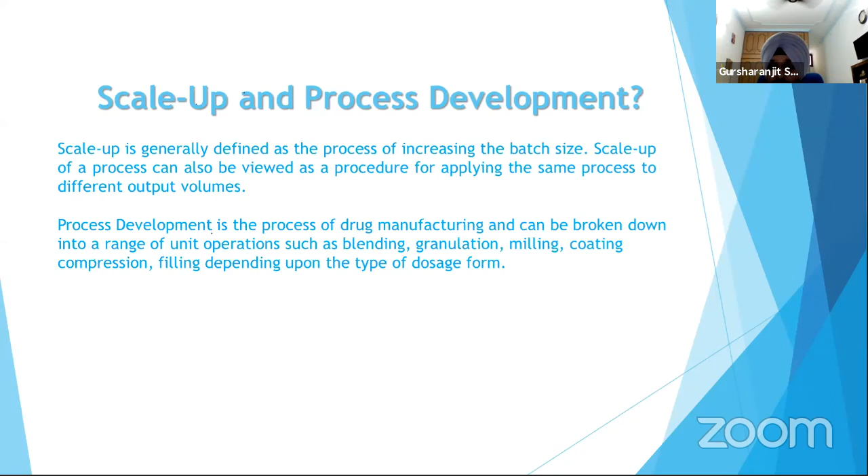Then comes the question - why scale up and when scale up? As I said earlier, whenever there is a need of the organization - it could be for filing purposes, or just to increase the batch size - we will be asked to increase the batch size by doing the scale up.

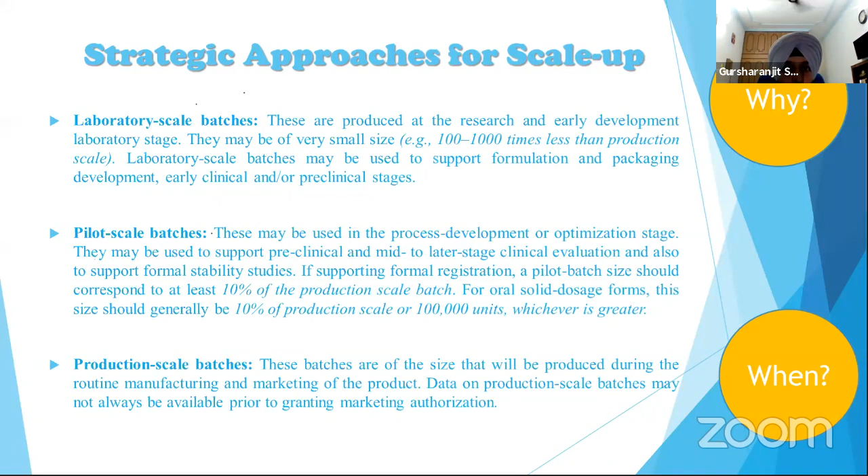Gursharanjit sir. Yes, sir. Please tell me.

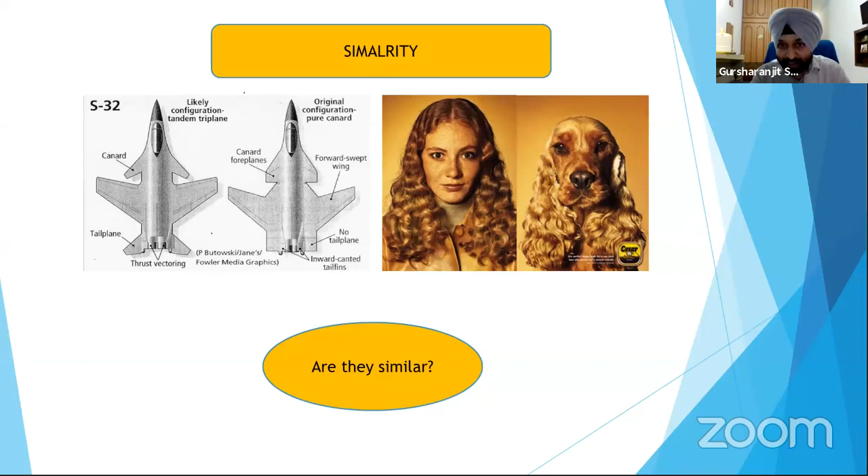So similarity is most important when we are talking about scale up and process development. I will come to the further slide which will give you more clarity about what I'm talking about similarity, and how to achieve process similarity during the scale up. So basically, if we want to go for a scale up, our process should be similar - it should be geometrical similarity, kinematic similarity, and dynamic similarity.

Geometric similarity means characteristic linear dimensions. Kinematic similarity is same ratio of velocities between two points, and dynamic similarity is same ratio of forces between two points. So process similarity can be achieved after getting geometrical similarity, kinematic similarity, and dynamic similarity.

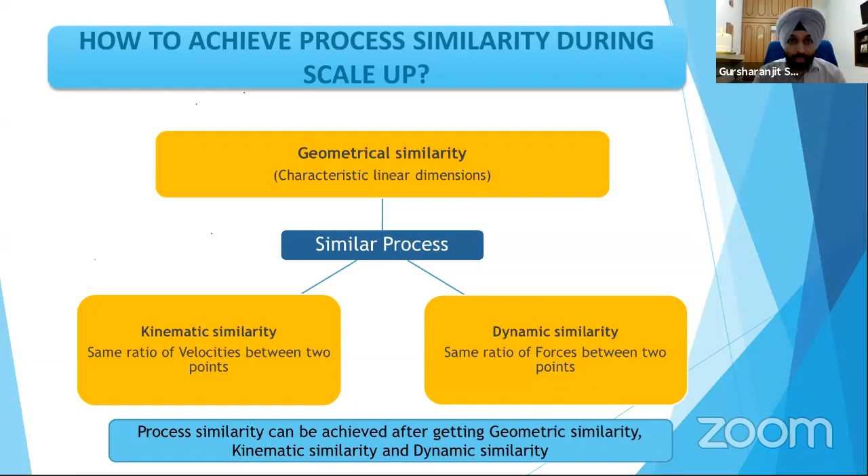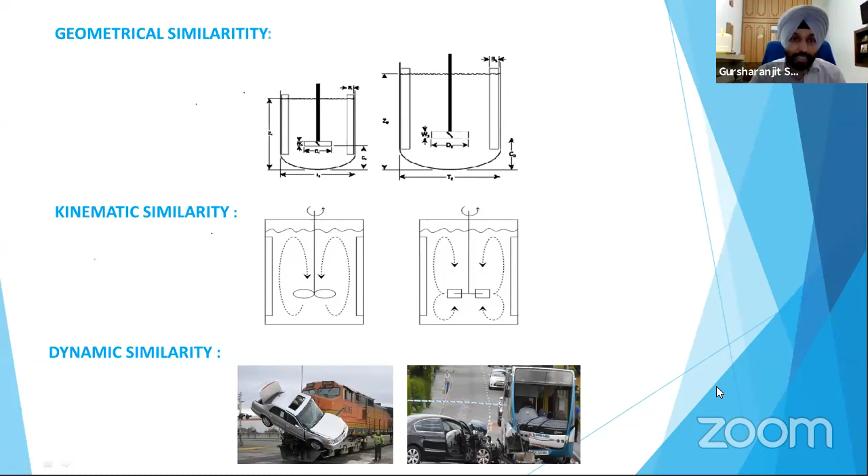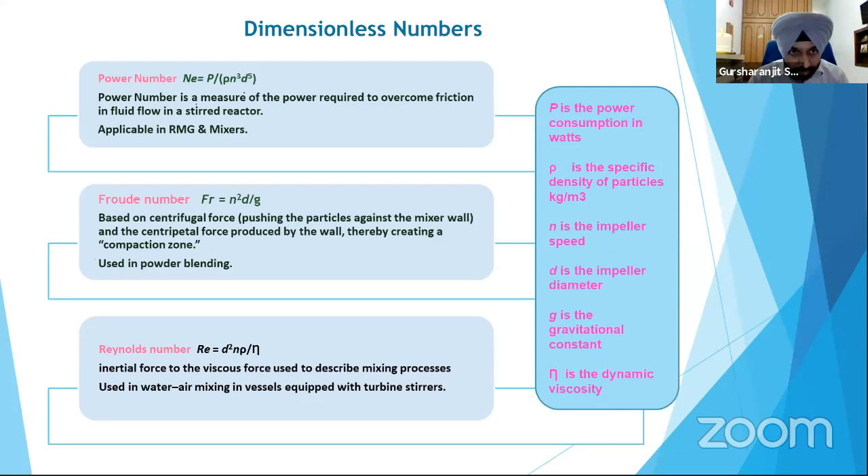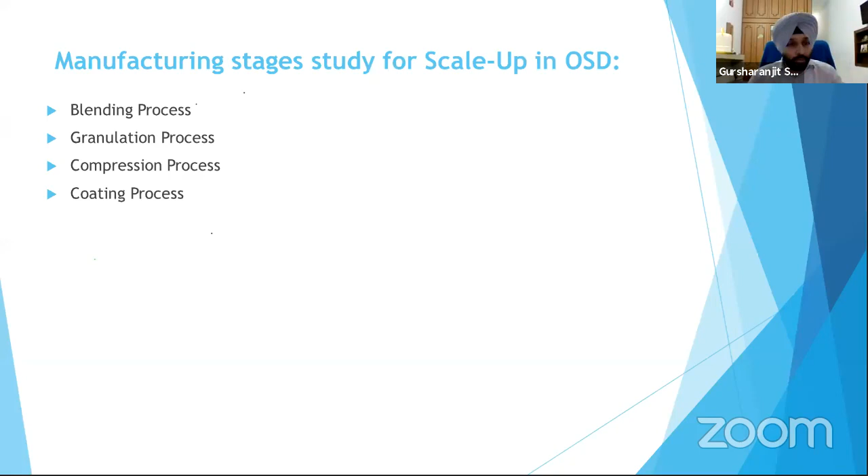In this presentation, basically I will be giving an overview of the scale up for OSDs, because OSDs are the dosage form which are maximum manufactured, and knowledge about OSD scale up is a must if anybody is interested to join the industry. So basically in OSD there are four basic kinds of unit operations: first is blending process, second is granulation process, third is compression, and fourth is coating process.

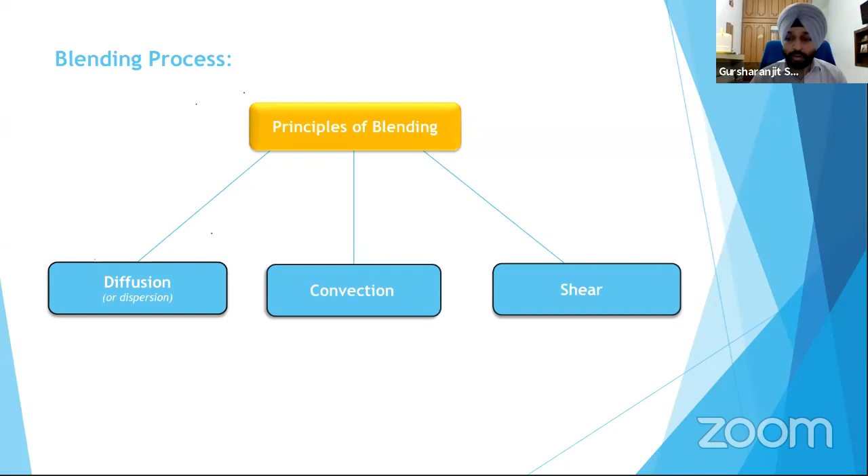Blending process is a very critical process, and the basic principle of blending is diffusion or dispersion, convection, or shear - these are the three basic principles for blending. For any oral solid dosage form where the dose is potent or low, like less than 25 mg, ensuring the uniformity of the blend is very important as well as critical.

So in this slide, I have presented the blending principle along with examples of various kinds of blenders used in the industry. Diffusion - what is diffusion? Diffusion is the redistribution of particles by random motion within the powder blend, which causes them to change their position relative to one another. Examples of blenders commonly used in the industry are double cone blender, octagonal blender, V shell blender, and bin blender.

Next is convection. What happens in convection? The transfer from one location to another within the mixture with motion is imparted by an impeller, as in the ribbon blender. I mean to say that here the movement of your powder will be with the help of an external support, that is a ribbon.

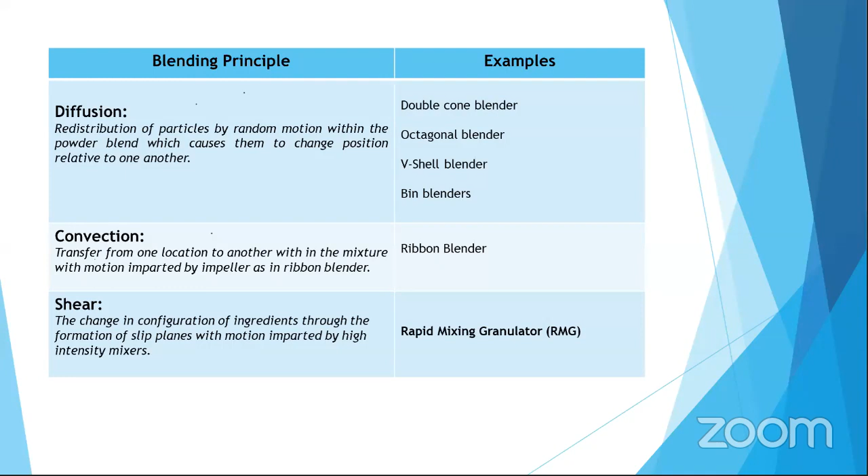Next is shear. Shear is the change in configuration of ingredients through the formation of slip planes with motion imparted by high intensity mixers. An example of this is the rapid mixer granulator, where impellers create the slip planes once they start moving, which helps in the mixing of the blend.

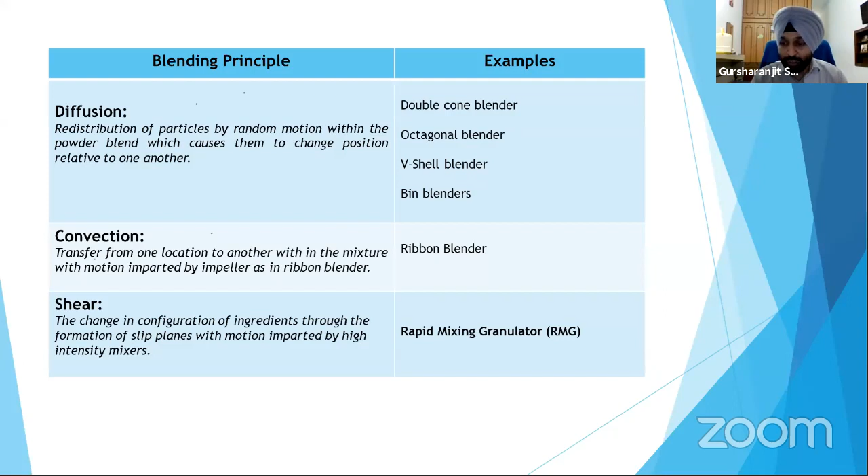So this is the pictorial view of different blenders which I talked about: double cone blender, octagonal blender, V blender, and bin blender. These are all diffusion blenders.

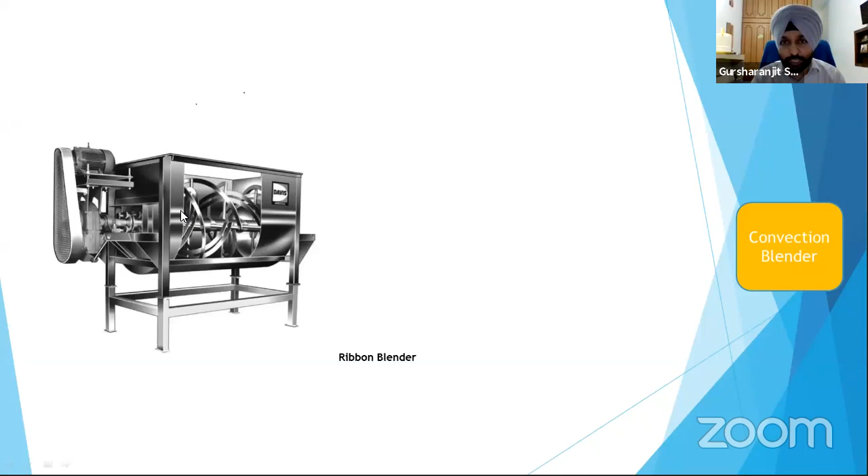Next is ribbon blender. There are a number of ribbons, and these ribbons move with the help of a motor, causing movement of the powder from one place to another. But these kinds of blenders are not used much in the industry nowadays. They are more frequently used in the bakery industry for making dough, because there are a lot of dead spots in these, and uniformity related issues, so these are not much used.

Next is shear mixer, which is a rapid mixer granulator. As mentioned earlier, it has impeller blades which help create slip planes in between the powder, causing movement of the powder, which ensures mixing.

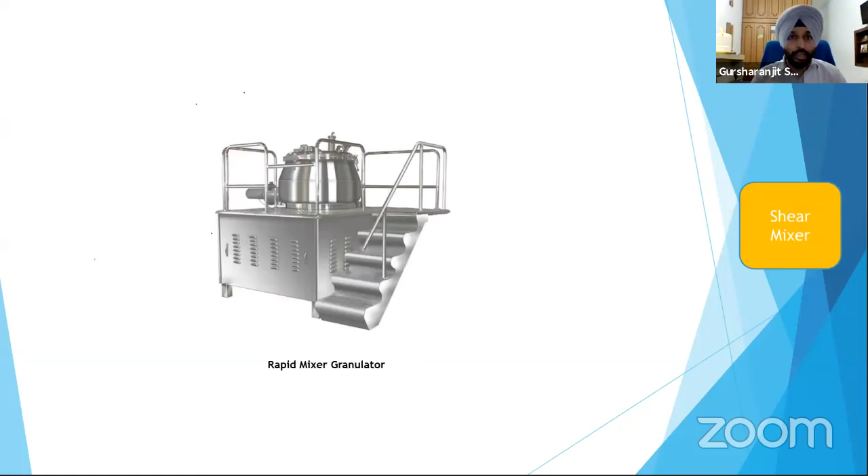Next comes the type of mixer and blender selection. It is very important. First of all, at the developmental stage, during formulation development, the scientist has to ensure what kind of mixer the particular product will require.

For example, free flowing mixture, these are non-cohesive. Free flowing powders have desirable features like minimal need of lubricant and effective contact with the die. They suffer from a serious drawback of segregation of individual components in the post-mixing process. Blenders such as bin blender and twin shell blender will be used.

Second is cohesive mixture. Cohesive mixtures exhibit stick-slip characteristics and components are not free flowing. The individual particles are repeatedly broken down and allowed to redistribute within the system to ensure a satisfactory mixed product. Blenders such as high shear mixer, twin shell with I-bar will be used. I-bar is nothing but an intensifier bar which helps mixing in a particular blender, also called baffles. These will have baffles or intensifier bars.

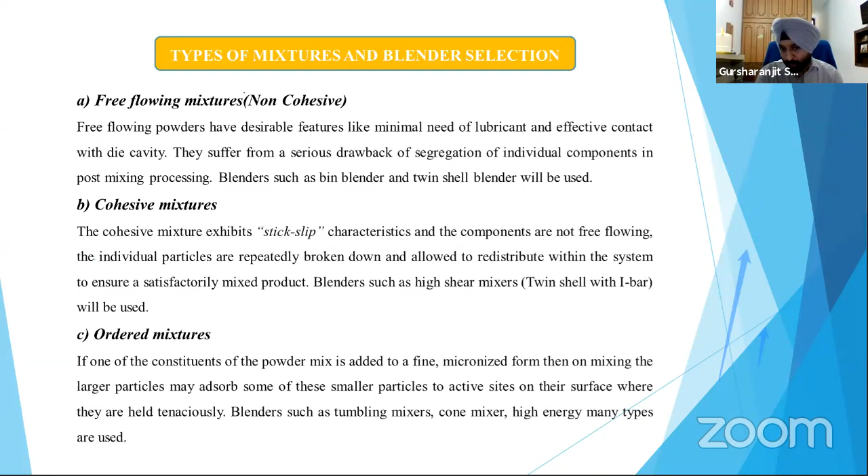Next is ordered mixture. If one constituent of the powder mix is added in a fine micronized form, then on mixing, the larger particles may adsorb some of the smaller particles on the active sites on their surfaces, and they are held tenaciously. Blenders such as tumbling mixers, cone mixers, high energy, and many other types are used.

Now comes segregation. If I'm dealing with a blend that is free flowing, there is a probability of facing an issue of segregation, which is a major headache for any formulation development scientist or manufacturing science and technology person, because this phenomenon is shown by most powders when the drug is very low in the formulation, or the formulation is potent.

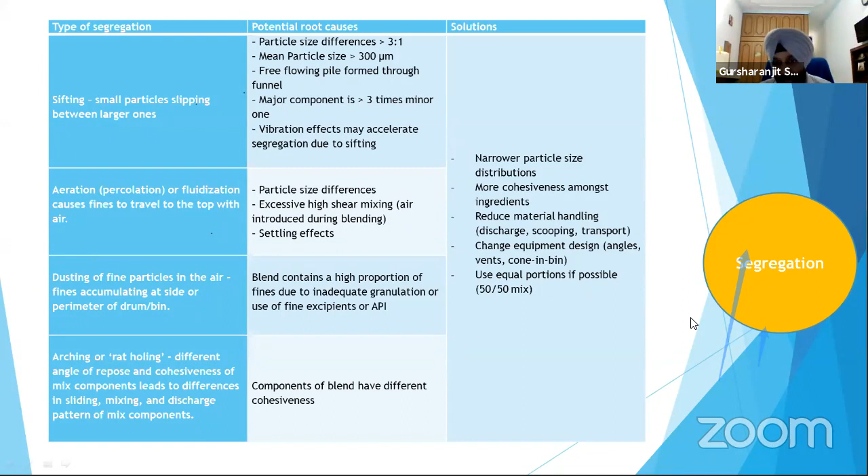Change in the equipment design, like angles, vents, cone in bin - these are mechanical or engineering related modifications which could be implemented in the design of the equipment, which will support and reduce the chances of segregation. So equal proportion if possible - the mix should have a 50-50 ratio. If we use a ratio of 50-50, there is minimal chance that we may face a problem of segregation. So next is scale up parameters.

Scale up parameters are very much important, and during the design and developmental phase, we have to work upon these scale up parameters very carefully. So how will it be done?

First of all, if I want to prepare a batch size of 100 kg from 10 kg, I have to look at what batch size I will be keeping exactly. How much kg I have to put in the container or blender shall be evaluated based upon the volume of the container as well as the bulk density of the product. Bulk density is very important because every product varies in nature due to bulk density, particle size, and other parameters. So first, we have to select very carefully what our batch size will be.

Second most important thing in the blender will be blender speed and blending time. We have to select blender speed in such a way that it ensures that at a particular speed and with that particular blending time, we are able to achieve uniformity.

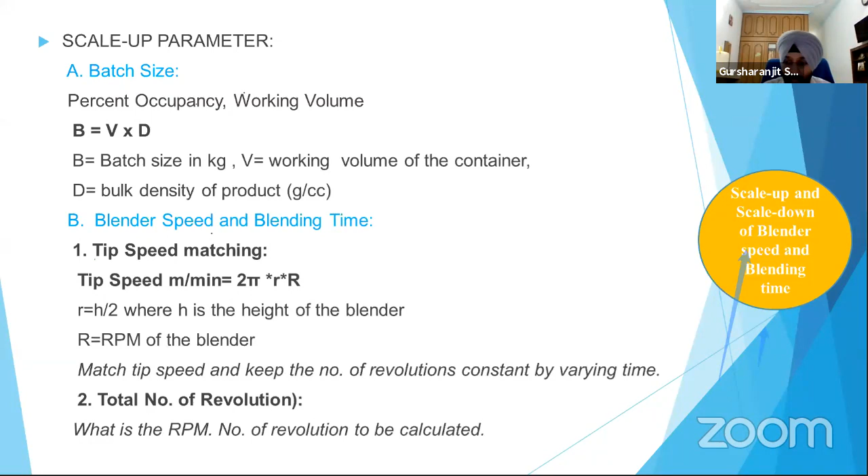Next comes the compression process. The prerequisite for compression is compatibility and fluidity. Here I have summarized the common advantages of the compressed dosage form: accurate, stable, and with least variability, cheapest dosage form, elegant, prolonged stability, great patient compliance, most stable with respect to physical, chemical, and microbiological attributes, low manufacturing cost, and ease of administration.

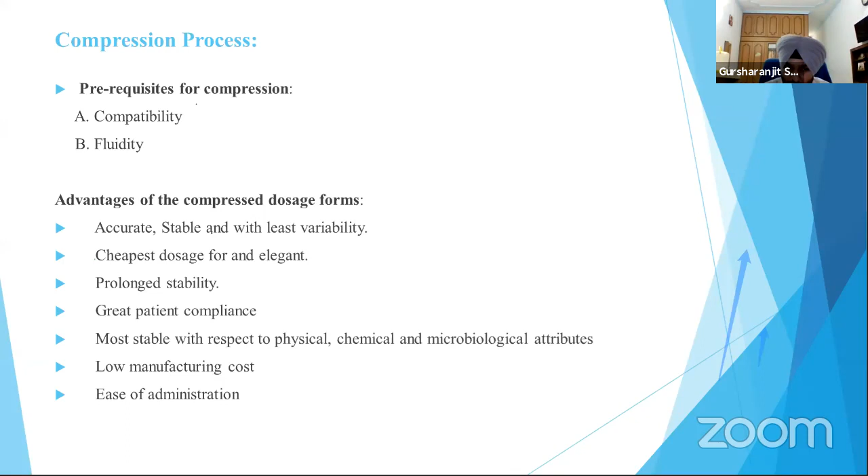So the type of the compression machine - different kinds of compression machines are used in the industry. They are single rotary compression machine, double rotary compression machine, and nowadays fully automated compression machines from different manufacturers are available, where we can study a lot of things in detail and a lot of data can be generated.

Here I have explained about the type of compression tooling. Different types of tooling used during compression are B tooling, D tooling, BB tooling, and DB tooling. This kind of tooling is based upon punch diameter, die diameter, and maximum size of the tablet. So if we want to select a tooling, we have to consider what kind of hardness and what kind of tablet weight is our requirement. Accordingly, the particular type of tooling shall be selected.

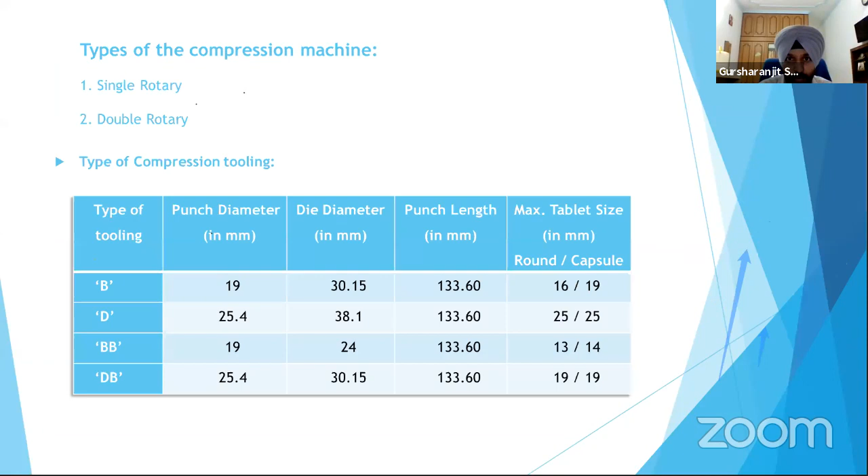There seems to be some problem. I'm not able to project the next slide. It is showing something black. No issues, I will explain that.

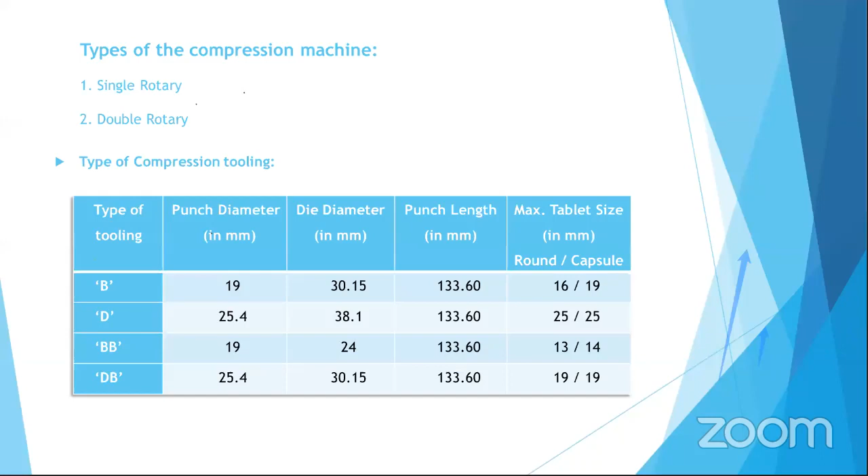Sujit, are you able to see the screen? Because I am seeing that. No, it's blank, I don't know, it seems to be some technical issue. It's okay, continue - while presenting I'm not able to see it, but I am able to see it on my laptop. Here also we are not able to see. Yeah, you can continue, no issues.

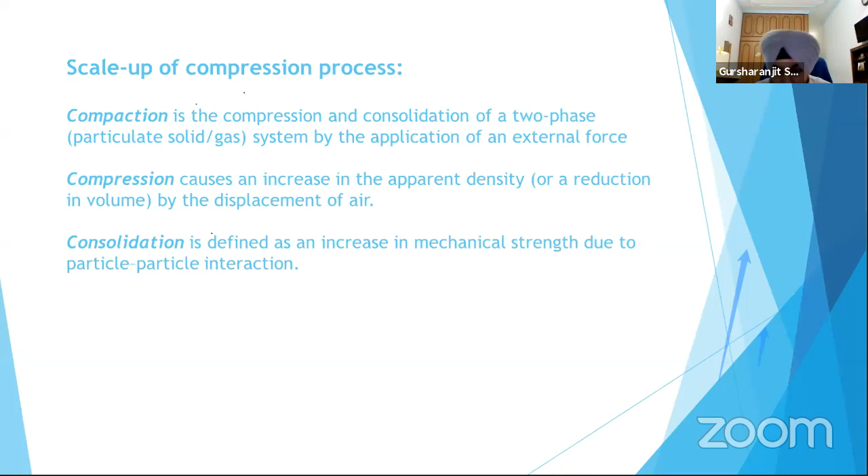Further are the few important terms which are used during the compression. Out of them, the most critical and important, I feel, is dwell time. I will explain about the dwell time, and the rest of the terms you can go through.

For example, this is feeding time, the time when the die is fed with the powder. Consolidation or solidification time is the portion of the contact time when punches are changing their vertical position in reference to the roll, decreasing the distance between their tips. Next is dwell time, the portion of the contact time when punches are not changing their vertical position in reference to the compression roller. Next is decompression or relaxation time, the portion of contact time when punches are changing their vertical position in reference to the rolls, increasing the distance between their tips before losing contact with the rolls.

Compression time is the portion of the contact time before the decompression period begins. Contact time is the time when both punches are moving and having their tips in contact with the material that is being compacted, and their heads are in contact with the pressure rolls. Ejection time is the time when the tablet is being ejected from the die. Total time is the time required to produce one tablet on a press.

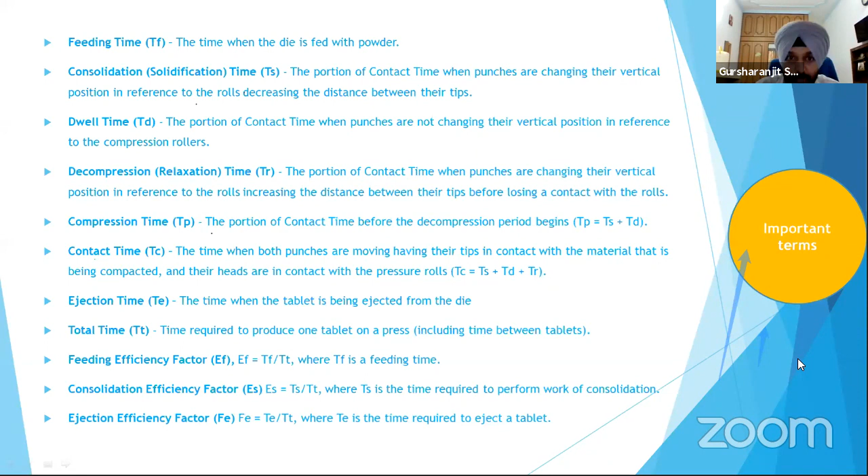So next is dwell time. We have already talked about the dwell time. Dwell time is very much important, and it depends upon the head flat as well as on the number of punches, pitch circle diameter, and tablets per hour.

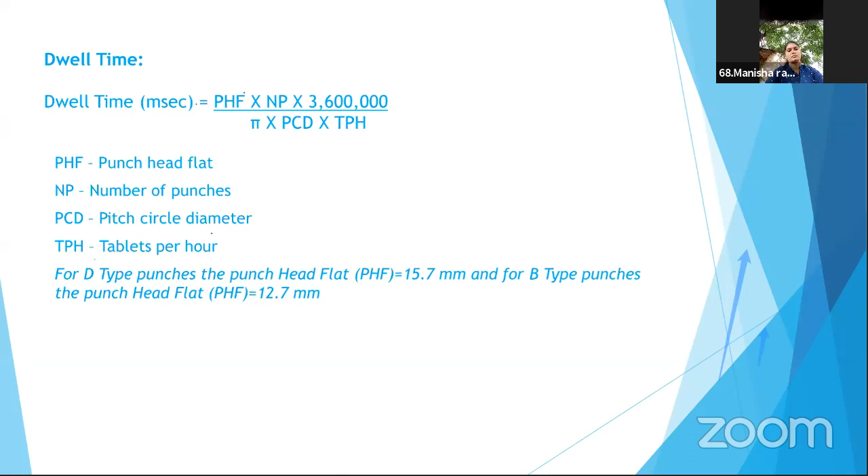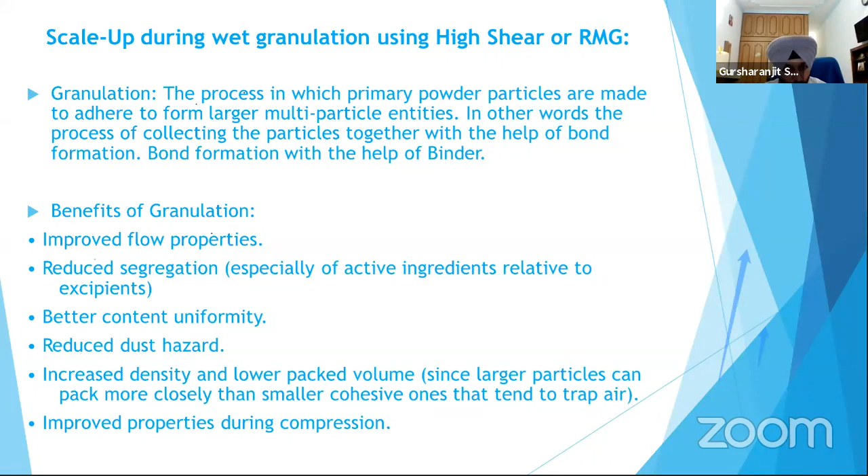So scale up during wet granulation using high shear or RMG. During the granulation, the primary powder particles are made to adhere to form larger multi-particle entities. In other words, it is the process of collecting particles together with the help of bond formation using binders. The binder will help the powders to come closer and come in close proximity, which is known as granules. The benefits of the granules are improved flow properties, reduced segregation, better content uniformity, reduced dust generation, increased density, lower packed volumes, and improved properties during compression.

At capillary stage, most of the binder will come in contact with the materials, or it will accommodate itself in between the granules and the powder. This is the endpoint where we should stop granulation. But after this, there is one more phase that a formulator or scientist should avoid, known as the droplet stage. If mixing is continued or additional binder, water or isopropyl alcohol, is added after the endpoint is achieved, it will form a droplet, which forms a lumpy mass, and the batch will be spoiled. So we have to take very much care during granulation that we should not reach this stage. We should evaluate the proper endpoint of granulation, which is achieved by recording proper amperages of the impeller and chopper, giving a proper endpoint and a proper product.

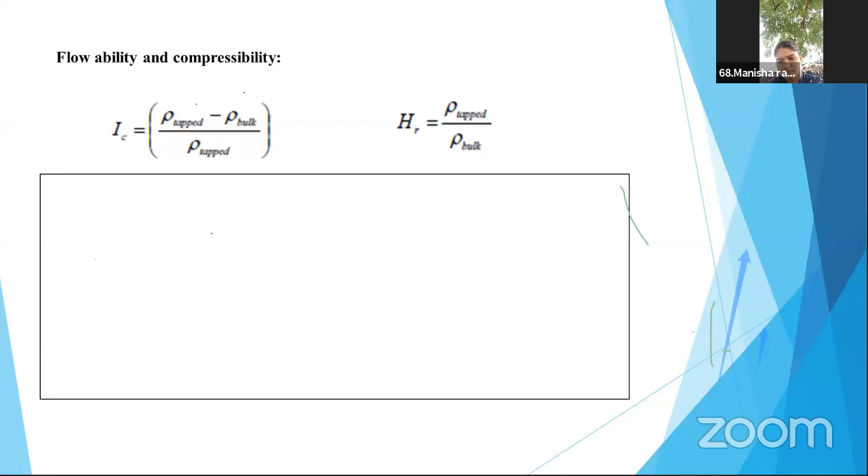So key points of wet granulation optimization: if at all we have to optimize the process, we should fix the type and quantity of the binder. As mentioned in the previous step, we have to avoid overwetting. To avoid overwetting, we have to fix the quantity and type of binder based on the characteristic of the drug and other excipients. If the drug is freely soluble in water, and we're using a binder which is freely soluble in water, then it will affect the endpoint.

And the diluents, for example lactose is freely soluble in water, but MCC is not freely soluble in water. So there will be a difference in the granulation using MCC versus lactose. The formulator or scientist should evaluate these things during scale up studies.

Spreading of the binder, temperature and viscosity are important. For example, if manufacturing a product with granulation using maize starch paste, if the consistency or viscosity of the binder is not fixed, how will the viscosity be controlled? With the temperature. So maize starch cooking is very important. At what temperature maize starch becomes fully cooked, at that point we should add the binder.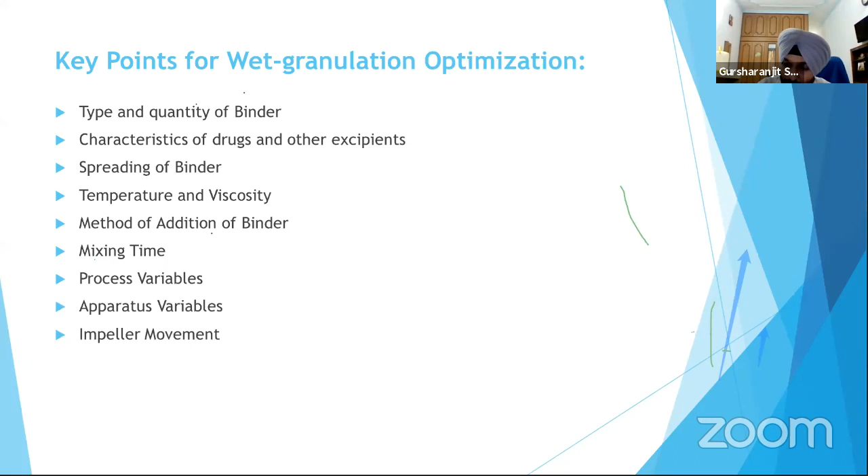Next is mixing time, and other process variables, apparatus variables, impeller movements. This will also play a very important role in wet granulation.

Next point: key important factors for scale up of wet granulation. First, as said earlier, geometrical similarity. The important point here will be the percentage occupancy. We should maintain an occupancy of the dry mix across all the scales to achieve geometrical similarity.

Powder bed to RMG diameter ratio is also very important to be properly evaluated. Third is relative impeller swept volume. So to achieve geometrical similarity, these three things are very important. Relative swept volume is the volume swept by the impeller for one revolution, represented as the ratio of impeller height and powder bed height. So impeller swept volume is equivalent to capital H, which is impeller height, divided by H, which is the height of the powder bed.

Next comes kinematic and dynamic similarities. To achieve these, we have to achieve the tip speed. To achieve the tip speed, we have to evaluate both the RMGs at lab scale, RMGs at pilot scale, and the RMGs at commercial scale. So we have to maintain the constant tip speed.

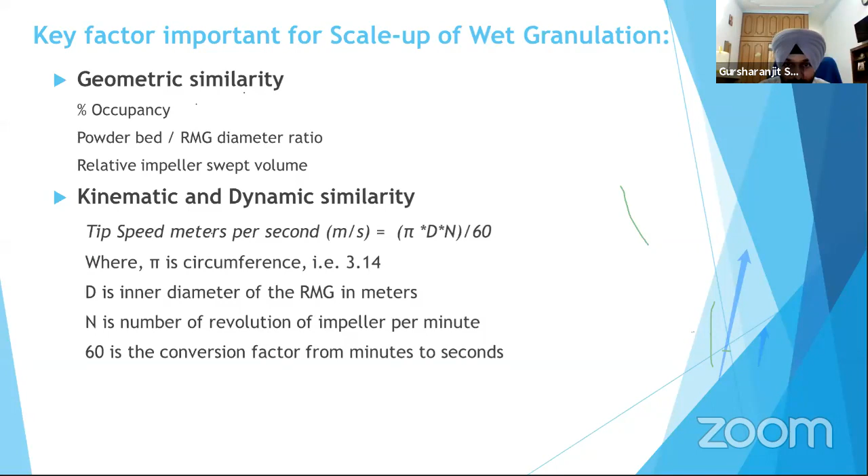Okay, if at all we are maintaining this constant tip speed, we can anticipate that the kind of granulation which will be achieved will be uniform or will be comparable at both the scales.

For achieving the geometrical similarity at different scales, here is a small flow chart. First of all, the equipment should have the same principle of operation. If not, scale up is not possible. If the principle of operation is the same, then we can proceed further.

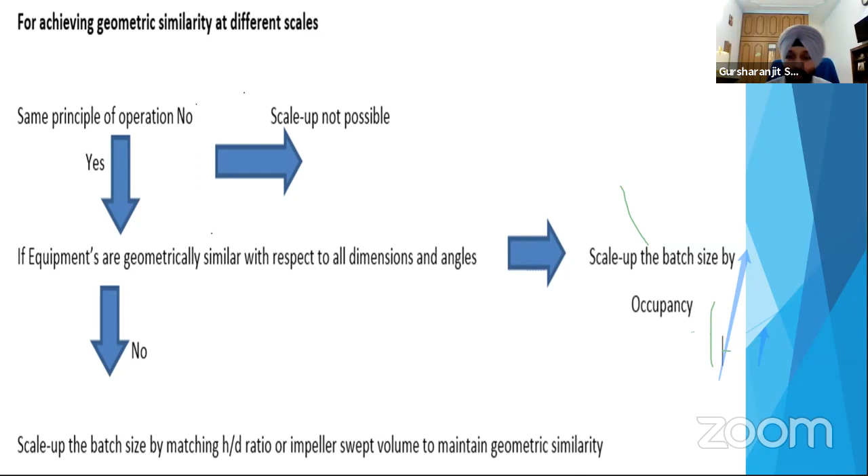If the equipment are geometrically similar with respect to all dimensions and angles, then scale up of the particular batch size along with the particular occupancy is possible. If they are not geometrically similar, scale up of the batch size by matching the H by D ratio or the impeller swept volume to maintain geometrical similarity has to be done.

So here in this slide, I have tried to present the linkage of the product with the process. Our ultimate goal is to send a very good product that is safe, that is effective, and it should be in the hand of the patient. So for that, what do we need to do, being a formulation scientist, a process scientist, or a process technologist? What is our role?

The critical material attribute shall be controlled. The critical process parameter shall be in control. If my critical material attributes and my critical process parameters are in control, then our product will be having controlled critical quality attributes. If my critical quality attributes are in control, the product will be having good safety as well as efficacy. So the clinical outcome will depend upon whatever CQA, CPP, and CMAs are controlled during the commercial scale or during the manufacture.

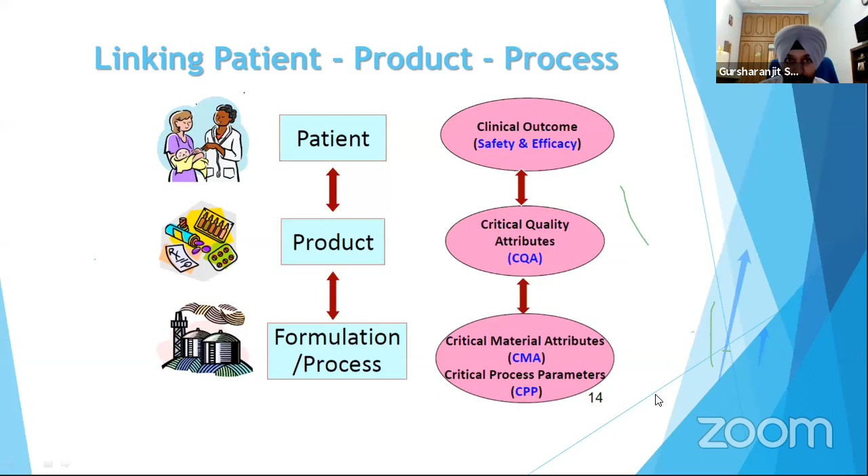So understanding of the CMA, CPPs, and CQA is very important. What is critical quality attribute? These three things are very much important to have a very good product. So exactly what is that? Critical quality attribute is a physical, chemical, biological, or microbial property or characteristic that should be within an appropriate limit, range, or distribution to ensure the desired product quality.

In other words, critical quality attributes, at the time of release of the batch, what should be my assay, what should be my dissolution, how much should be the percentage of impurities present in my product at the time of release. All these are the critical quality attributes.

Next is critical process parameters. Critical process parameter is the process parameter whose variability has an impact on a CQA, and therefore should be monitored or controlled to ensure the process produces the desired quality.

Next comes the critical material attribute, a physical, chemical, biological, or microbial property or characteristic of the input material that should be within an appropriate limit, range, or distribution to ensure the desired quality of the product or material output.

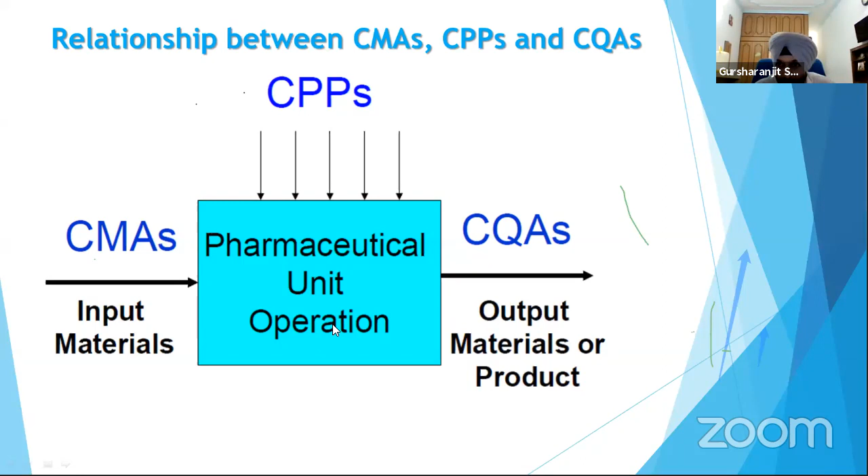So here again I have presented the relationship between all the three. First, there are CMAs of the input material. Next is my CPP, so I'm giving appropriate CMAs. Then I have to control my CPPs, and in turn I will be getting CQAs of the output material that will be complying to the final quality of the product.

So this is the example which shows the approach to identify material attributes and process parameters. A combination of a perfectly designed process with control on CMA and CPP will be able to deliver the product within the predefined CQAs. So the first step, if you will see, is identify drug product CQAs.

Second step is for each process, identify intermediate CQAs that impact drug product CQAs. Step 3 is identify material attributes and process parameters that may impact the intermediate CQAs of the process step.

For example, my drug product CQA is content uniformity. Content uniformity is very much important when my product is potent, meaning my label claim in the formulation or tablet is less than 25 mg. I'm having a label claim of 1 mg or 2 mg. Then it is very much important to ensure proper content uniformity.

So for that, intermediate CQA will be very much important. What will be my intermediate CQA? My intermediate CQA will be blend uniformity. During blending stage, we have to ensure that my blend is uniform when sampled from different locations of the blender. Once my intermediate CQA is under control, obviously my final CQA, that is content uniformity, is achieved. Generally, content uniformity is performed on the stratified sample.

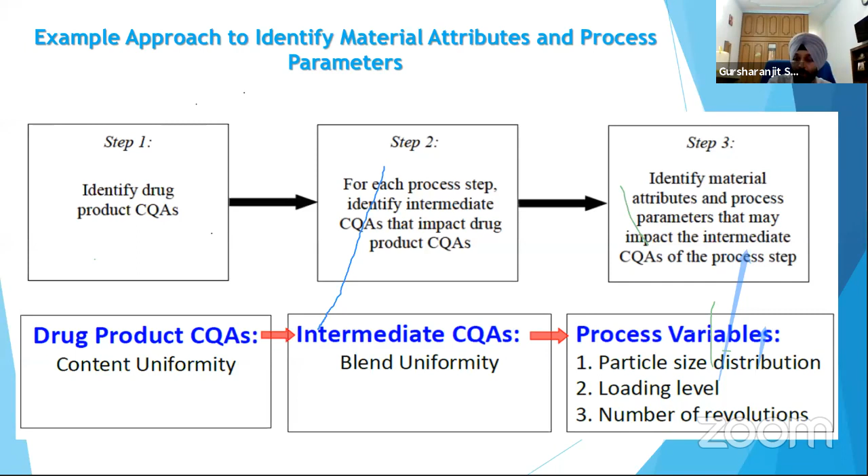Next is identifying the potentially high risk material attributes or process parameters. The first column shows input materials, which include particle size distribution and particle size. We have already briefly discussed that.

The purpose here is that we are identifying potentially high risk material attributes. Different material attributes are shown: particle size distribution, fines or oversize, particle shape, bulk or tap density, cohesive or adhesive properties, electrostatic properties, and moisture content. But if my CQA is blend uniformity...

My quality attribute is blend uniformity. So for that, what is most important? Mixer load level or the number of revolutions, and also environmental temperature and RH. That is not very critical, but it depends on product to product. If my RH is very high, there are chances that my material may grab moisture from the environment while manufacturing, and it may show sticking or adhesion to the walls of the manufacturing vessels.

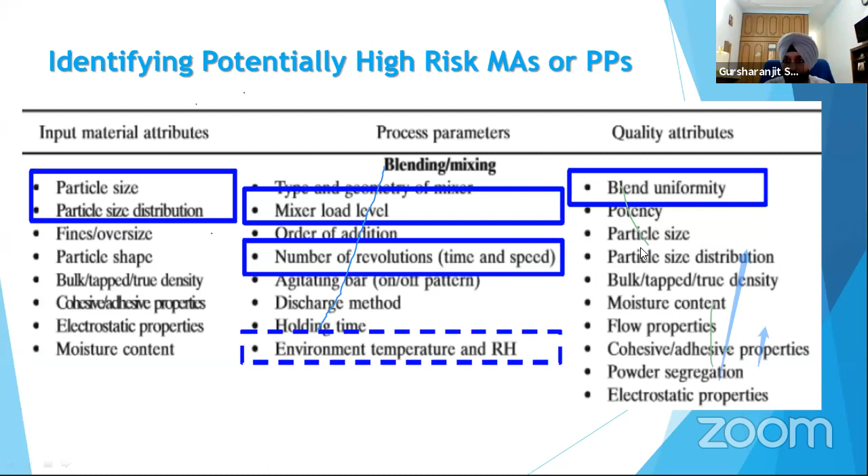Next is film coating. For film coating, the parameters will be pan load, spray rate, temperature of the exhaust air or inlet air, and coating weight gain. So the measured attributes will be tablet appearance and tablet water content.

So on the basis of all these studies, control strategy shall be provided, and on the basis of all the studies and this control strategy, validation shall be planned.

During validation, if I am doing a blending step, I've already assigned how much blend revolution will be there, how much blending time will be there, or at milling what kind of screen shall be used, and what will be the speed of the impeller.

If it is intragranular lubrication, what is the percentage of the bin loading, what is the revolution of the blender. If it is dry granulation stage or milling, roller force, how much is the roller force, how much is the gap width, how much is the mill screen, how much is the roll speed.

If it is extra granular lubrication, percentage of the bin loading or blend revolutions. During compression, how much is the compression force based upon the tablet hardness, compression speed, dwell time. And if it is film coating, how much is the percentage of the pan fill, how much is the exhaust air temperature, exhaust air humidity, and coating weight.

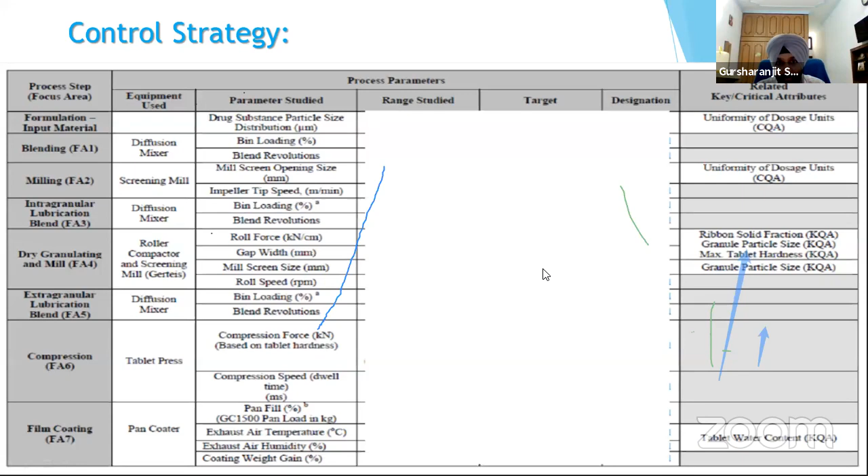In other words, my product will be having all the quality, safety, and efficacy as per the predefined specification, if these things are met. So this is how a process is developed and how a scale up is done.

This particular topic is a very vast topic, and being students, I thought of giving you a glimpse of each and every stage. There was shortage of time, and I was not able to accommodate much more material, which maybe some other time I will try to explain further, so that you have a better idea how a process is developed and how scale up is done at the industrial scale or commercial scale.

These are the references which I've taken from FDA, as well as from Pharmaceutical Dosage Form of Tablets by Larry L, and Developing Solid Oral Dosage Forms by Yihong Qiu, Pharmaceutical Process Scale Up by Michael Levin, and ICH Pharmaceutical Development Q8.

I will suggest, if you are keen to learn more in this, because this scale up is a very critical task and it involves a lot of studies and calculation, my personal recommendation will be that you go through the book Developing Solid Oral Dosage Forms, and once you go through this, try to read the third book mentioned, Pharmaceutical Process Scale Up by Michael Levin.

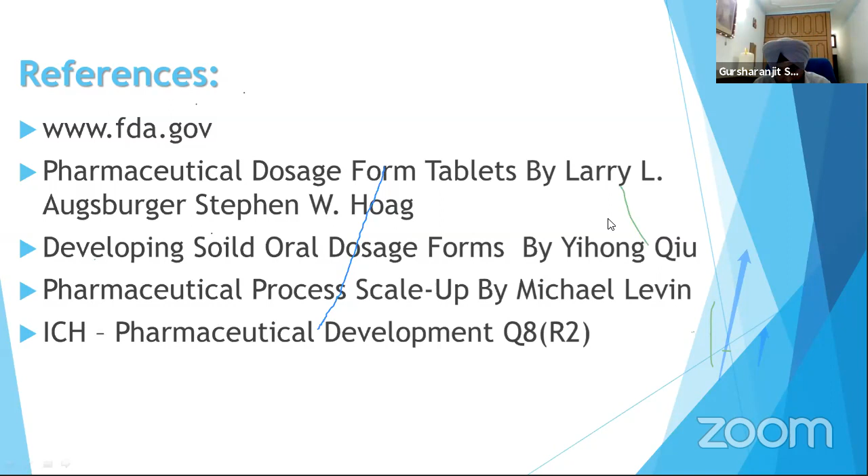Okay, fine. So first of all, for the liquid dosage forms, the most important thing will be that whatever the API, it gets dissolved uniformly. So clarity of the syrup or solution is very important. If it is a suspension, then the redispersibility of the suspension is very important. In that case, the important parameters will be my agitation times, my RPMs which we will be keeping for mixing all those, and especially the problems which I have personally faced, so I will share that. We don't face much problem during syrups, because in syrups the sugar syrup used and the API are freely soluble, and the only thing is, if required, we have to adjust the pH. Apart from that, there are no major challenges, and we add flavor and other things.

Yes, we do have challenges in case of suspensions. Suspensions are a little bit more critical and need to be taken care of, and more important is the kind of impeller used, so it will ensure the uniformity of the suspension. At the same time, in the formulation, what suspending agents are used, so that flocculation could be avoided. In Glenmark, I was there, we faced issues in the marketed product where the suspension formed as solid floccules and the product came back from the market. Again work was done on increasing the redispersibility of that suspension, and further flocculating agents were added. So these were certain kinds of challenges which I personally had.